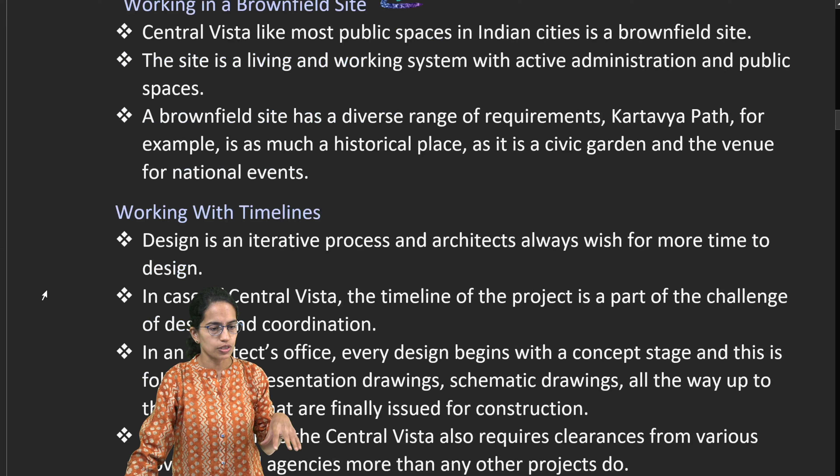Kartavya Path is one of those, and this whole project is a challenge because from concept stage to finalization stage, it requires approval from various agencies, and two approvals cannot be submitted simultaneously, so approvals have to be done one by one.

Kartavya Path, as I said, is one of the major developments of this Central Vista project. This is the Rajpath road, and it has been developed in a new way with green spaces, CCTVs, sitting stone benches, granite lanes, and refurbished landscape.

Lawns have been refurbished, and more aerators and filtration tanks have been added to ensure clean water supply. Public amenities have been constructed, and the idea is to maintain the art and aesthetics of this region.

Next, with historical development, we have seen not just this but the craft, the culture, and the Archaeological Survey of India has also taken steps in preservation of heritage, with various improvements. For example, the culture centered around Sufism and Qawwali has gained importance. Traditional building materials like stone, bamboo, and timber have been reused in most of the designs.

Humayun's tomb and its restoration is important. It has been declared a World Heritage Site, and within this declaration, there has been a huge increase in visitors. The project has been given to the Aga Khan Trust for Culture.

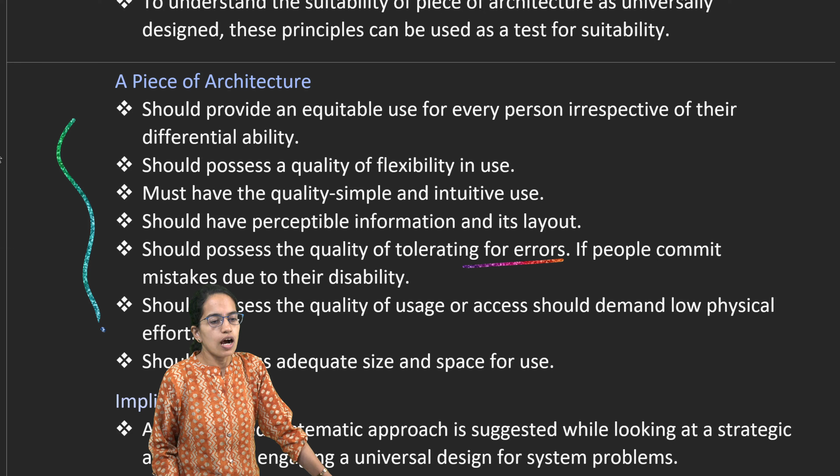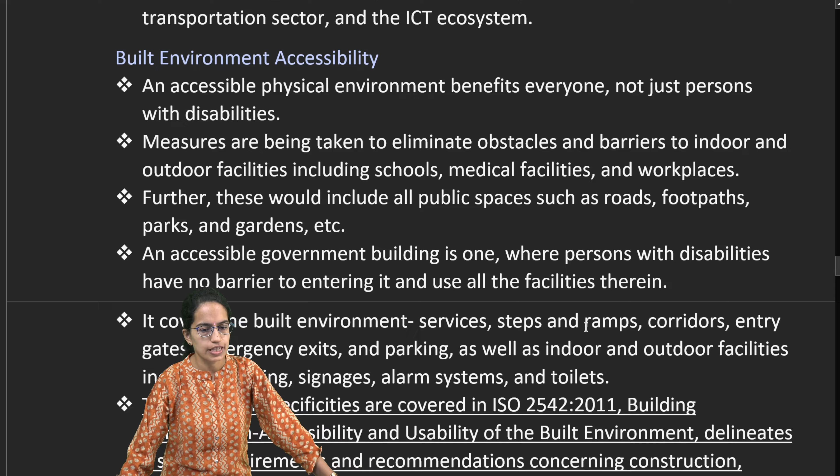Making sure there is flexibility, simplicity, good information, tolerance for errors, quality of usage, and adequate size and space is important. Also focusing on the implications, how a systematic approach can be devised, and what is the built environment accessibility. The ISO certification, building construction accessibility and usability makes this a unique platform.

When we are talking about designing universal public designs, this should be accessible with well-lit corridors. There should be tactile flooring for visually impaired, double height handrails for support, and wide, obstruction-free corridors for wheelchair movement. All these have to be taken into account under Sugamya Bharat Abhiyan.

When we talk about architecture, the wide spectrum of health encompassing wholesome health, which is the physical, mental, and social well-being of an individual, has been taken into account. Bicycle lanes, no car zones, and green spaces are some examples of the same.

Recently one of the conferences was held in Lucknow, which talked about the basis for city planning, city building, and proper sanitation. This was back in 1914, but still based on these lines there have been huge developments. If we go back to the cities of London and Paris, we have seen that they faced great fires and great stinks, mainly dealing with health, hygiene, and disease problems in those areas.

With the BIS building code 2005 and its subcodes like SP41, there are various functional requirements for the cities and for the buildings. The lighting code is given, along with the architecture and guidelines for those.

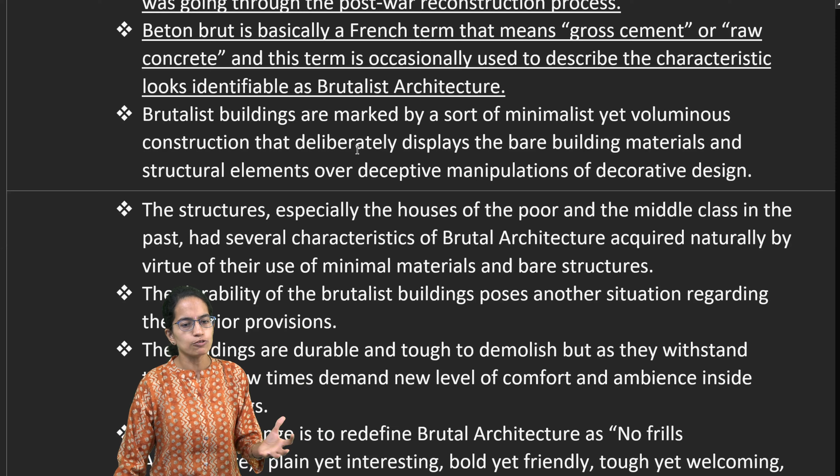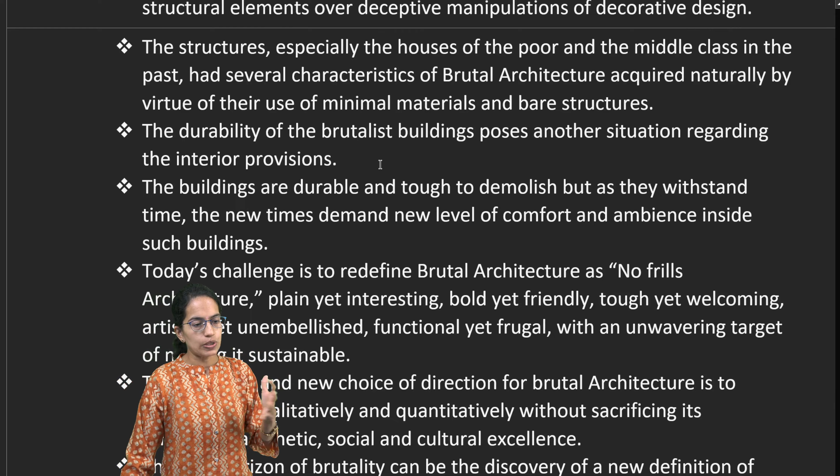It has very specific structures of houses for the poor and the middle class, with a natural virtue of using minimal materials and bare structures to construct. This is a very new direction in which we are taking new architectural designs.

Then is the Statue of Unity, a testimonial to Sardar Patel and his life, built over a location facing the Sardar Sarovar Dam, on the island of Sadhu Bet in the river Narmada in Ekta Nagar district, Rajpipla, Gujarat. Engineers have worked hard to create a tunnel effect for the winds flowing down the river.

It can resist winds up to 220 kilometers per hour. It is located within the island, within the river Narmada.

It has 5 zones. Zone 1 is the mezzanine, or the roof of the memorial garden with a museum. Zone 2 is where the thighs of the statue are. Zone 3 is the viewing gallery. Zones 4 and 5 are not accessible to the public - 4 is the maintenance zone, 5 is the head and shoulders.

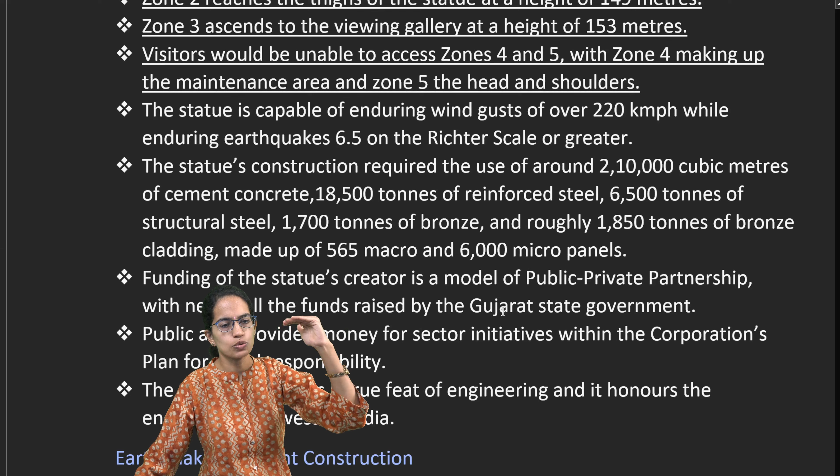This statue has required so much material, the list of which has been given here. The design is earthquake resistant, which is very important - it can handle a shock up to 6.5 on the Richter scale.

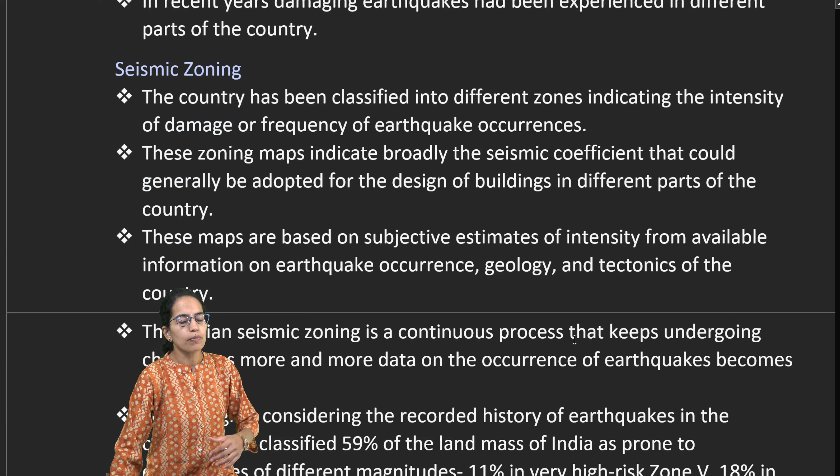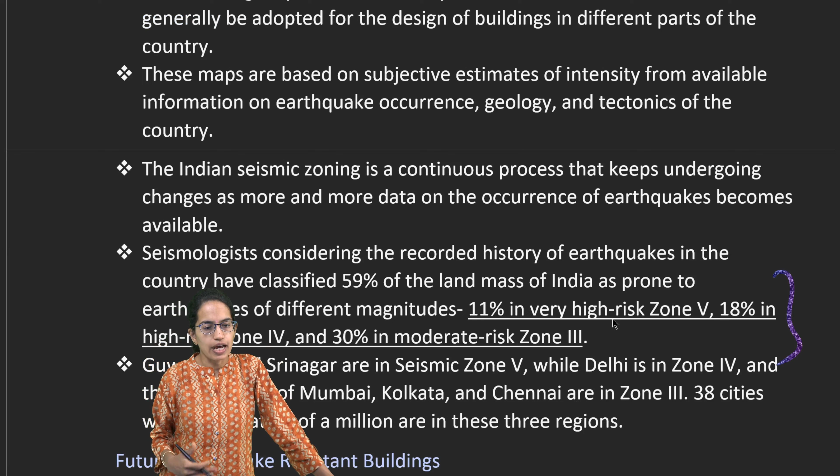If we talk about India, seismic zoning has been done. 11% of the country falls in very high risk, 18% in zone 4, and 30% in zone 3. Guwahati and Srinagar are in zone 5, the highest risk zone, while Delhi is in zone 4, the next one.

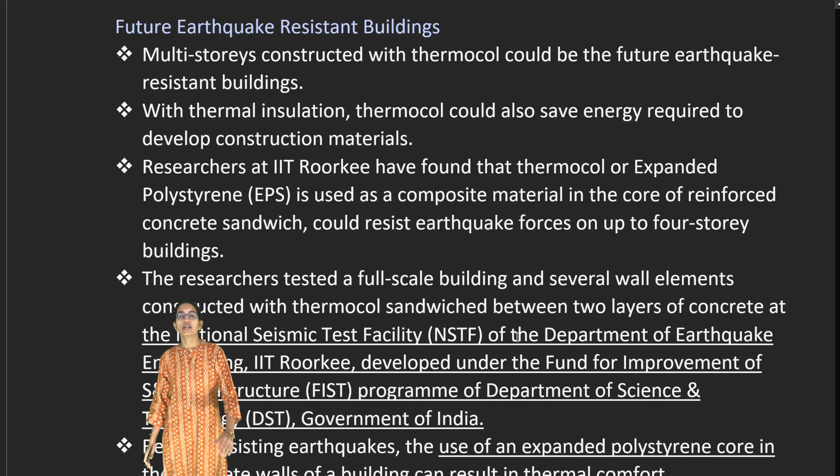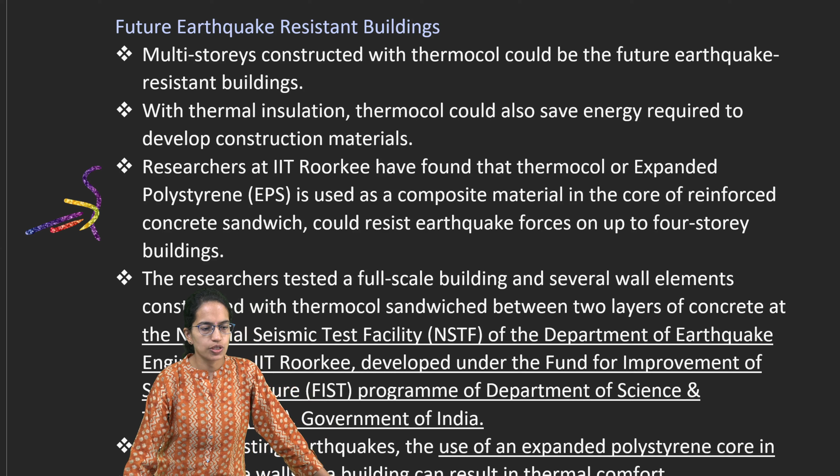Now, when we talk about future earthquake resistant buildings, thermocol, or expanded polystyrene, is one of the materials used as a composite material between walls. This has been tested by the National Seismic Test Facility and Department of Earthquake Engineering at IIT Roorkee, and this would be the basis for providing thermal comfort as well as earthquake resistance.

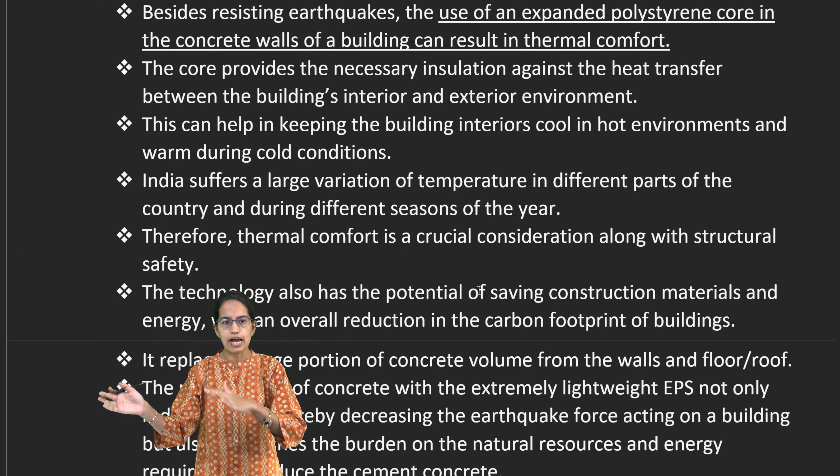It is extremely lightweight and reduces the mass, and therefore the earthquake force acting on the building gets diminished, in contrast to real cement concrete which is used otherwise.

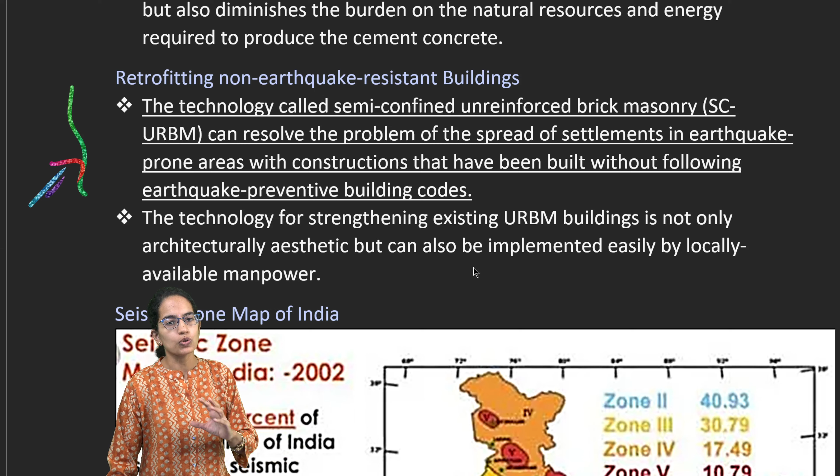The technology called semi-confined unreinforced brick masonry can also solve problems in earthquake-prone areas by building without earthquake prevention building codes. This technology is architecturally also aesthetic and can be implemented with local manpower.

This is a zone map which talks about the various zones. The zones in red, as you can see, are the areas highly susceptible to earthquakes, and then there are the other zones which are demarcated. The one in blue is the least dangerous of all the zones.

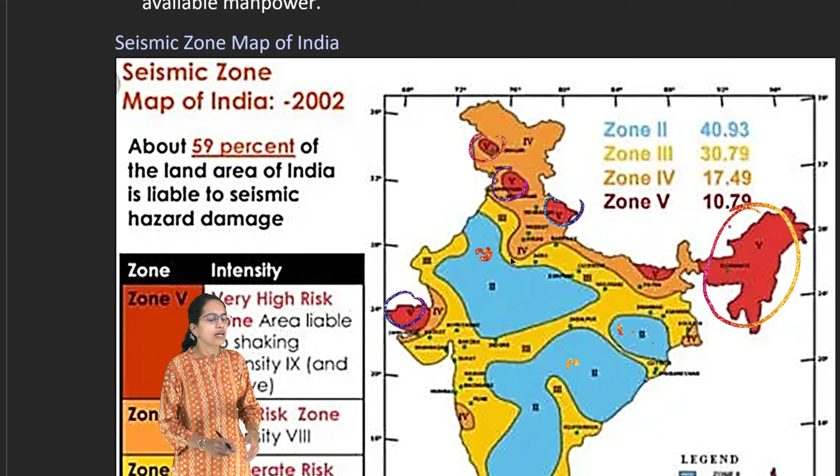So this was about some of the important topics that we have discussed in this lecture.